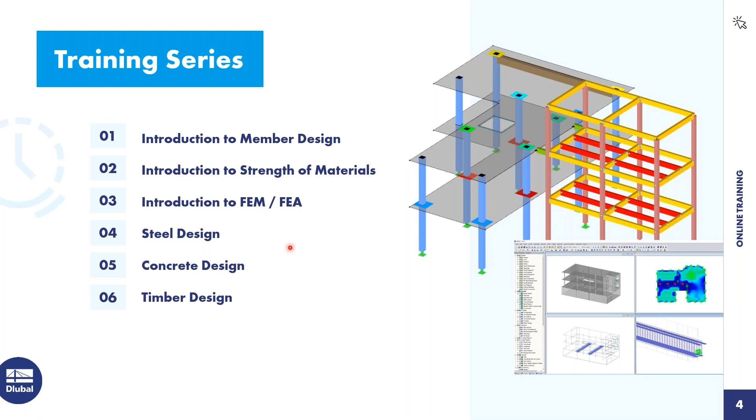Good, so our training series, 6 parts today, the 5th part, the concrete design. And yeah, what can you expect from today? So first of all, we start with an introductory example. We will model together a concrete beam with a cantilever. And then I will forward to Juliane and she will show you how to design our concrete slab. So let's jump right into it.

No theory, only modeling in RFEM 6. So I will open this example and I will create a new model. So for this case, I think it's familiar for you. I'll go here to File or click here on New Model. And now I create here in this dialog a new model with the name concrete beam. Yeah, I will leave it here as 3D type of model and everything else is set.

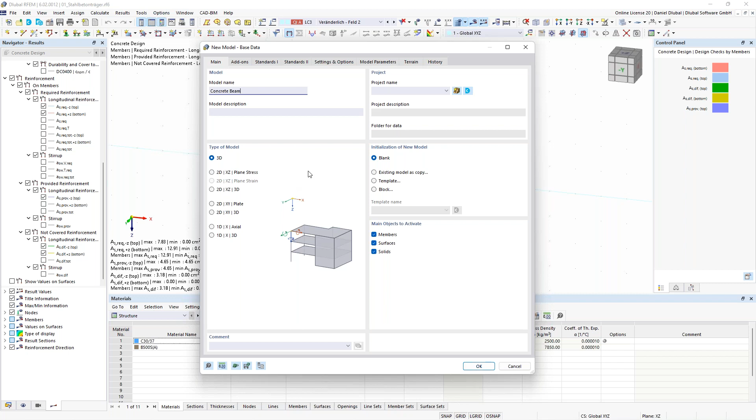And now for me, it's important to activate the add-on concrete design. So here we go to the design add-ons, activate concrete design, because then we get additional design properties for our concrete beams or concrete slabs. So I have to activate this. When I have activated this, I go here to the 3rd tab, Standards. And here in the Standards, I see here different chapters like for the design, standard group, load results, and also load case classification. And here I want to design it according to the European or to the Eurocode, with this national annex of Europe. Okay, I will leave it like that and just click on OK.

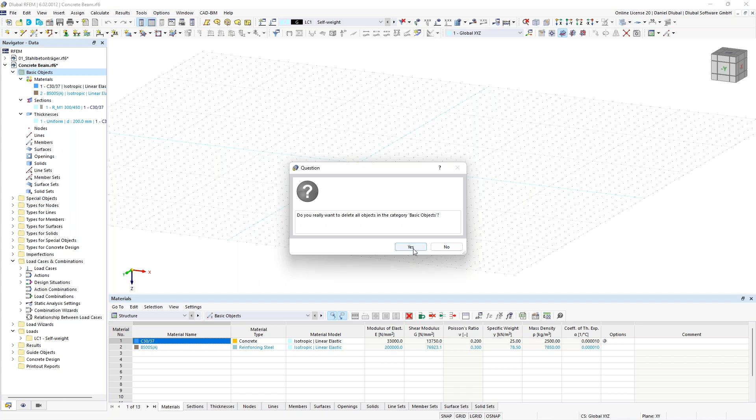And a new window opens. And as you can see here on the left side, I have here already some materials, sections and thicknesses. So they are remembered from the last project, from the last project I did. So I will delete them in order to create all these 3 things by new, just to show you how to do it. Okay, so you can click here on basic objects with the right click and say, okay, delete all basic objects. And now we can create it from scratch.

Okay, so before we do this, I would like to know from you if you have already some skills in concrete design with structural analysis programs, just to show me or give me a kind of status about your knowledge regarding your concrete design skills. So I have prepared a poll, which I will start right now. And please answer me these questions in order to give me a feedback about your knowledge.

Okay, now most of you have voted. I close this, share the results. So most of you have already designed concrete structures in a structure analysis program, I hope it was RFEM 6 or RFEM 5. For those who don't have this experience, that doesn't matter, you'll learn it today.

Okay, back to RFEM. Here on the left side in the data navigator, I will create 2 materials, because for concrete structures we need 2 materials: one for concrete and one for the reinforcing steel. So I go to new material. One of the biggest advantages in RFEM 6 is that I can search for a material via this text box. I enter C30/37. I am from Germany, and I will design it according to the Eurocode, because this is the only standard I know. This is the reason I choose this one.

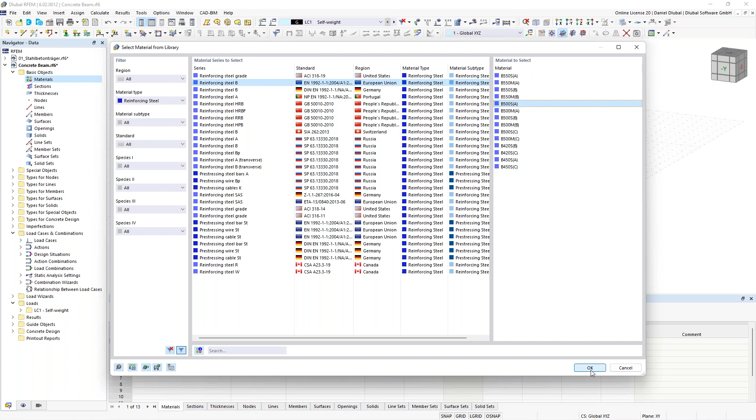In this case, I choose here B500 SA. I click OK, and yeah, this was it. I click OK again.

The next one is to create a new section. Because we will model and design a concrete beam, I click on section, then new section. I have to choose this rectangle massive cross section, or if you don't have this, go to the cross section library and choose the massive rectangle. Then I can give the geometry: I have a width of 300 millimeters and a height of 450 millimeters. Then I can see the section values according to this geometry and also the stress points. If I want, I can also show the unit stresses. In concrete design it's not so important, but we have implemented this here too. Okay, that's everything, I click OK.

Thicknesses, I don't do right now. This will be more the part of Juliane, because she will show you what thicknesses are. Thicknesses are similar to the cross-section things for members. Yeah, this is the similar thing - thicknesses you need for surfaces, and sections for members.

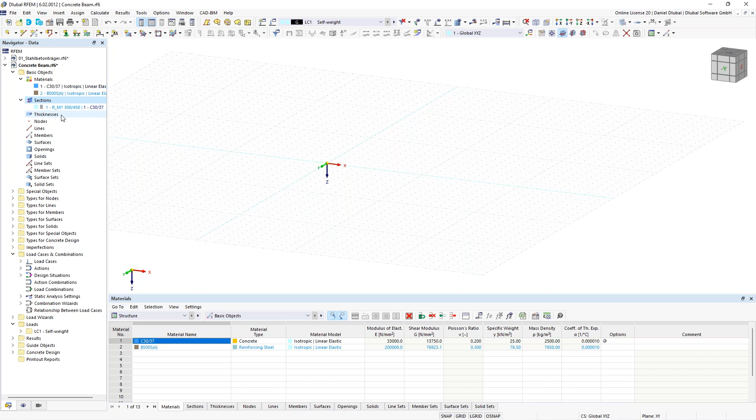Okay, so now we will model it together, we will model the beam. I go to the symbol bar, click on new single member, and now I choose the right section because I have only one section. This is everything, so I click OK and draw this member 8 meters long. I can do this via the grid points or also by inserting the member length, like 8 meters. As you can already see, we already have the provided reinforcement based on some general information about this concrete beam. We can modify it afterwards, of course.

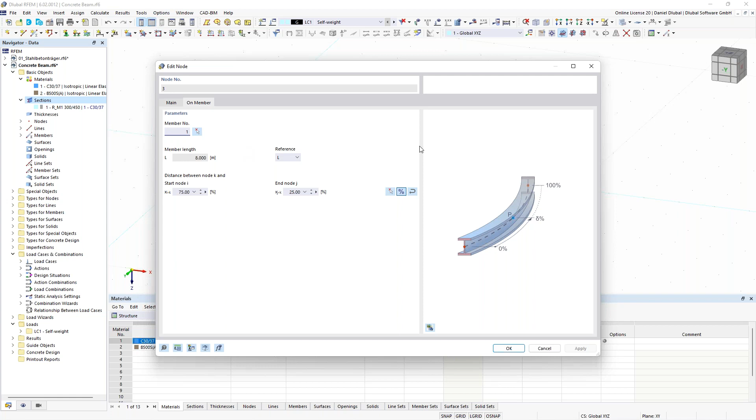What I want to do right now is divide this member internally, so the member remains as one member, but we add an internal node. Double click on the member, activate the option nodes on member. I want to switch to an absolute distance: I say, okay, from start, 6 meters away, and there it should create a new node. I click OK, and you see this blue node. Double click on this node - it has the node type 'on member'. So this is a really nice opportunity, giving this node the option to be part of this member and not to divide it.

Okay, so the next thing: supports, node support. I create a new nodal support. I want to activate the rotational around the global X axis in order to prevent torsion, and then a roller support along the X axis. This is this one. I click OK. Perfect, okay, so much for the modeling.

Now let's go to the load cases. I go to the symbol bar, edit active load case, and here I have the self-weight, this is okay for me. Now I want to also consider an imposed load case. In this case we have two fields, one field and the second field. So I create the first one, this is imposed load field 1. Now I copy it and click field 2.

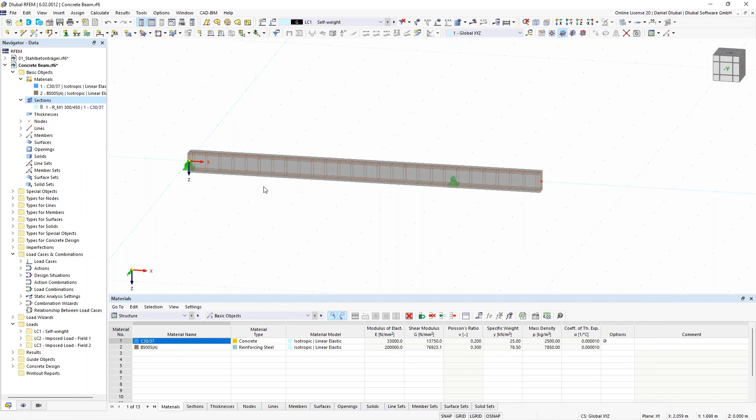Now I choose load case 1 because then I jump to load case 1 where I set some loadings. Okay, so the whole concrete beam has a member load of 10 kilonewton per meter. I click on this member load, and insert a value of 10 kilonewton per meter.

The biggest advantage here in RFEM 6 is that I can stay in this dialog, just select the same member, and then afterwards change the load case and add the parameters like the load magnitude again to the members. I don't have to leave this window. This is a real good advantage. So I click on this member, say apply and next.

Now I change the load case, and I have to change the load distribution because we only want to apply the load on the left field. So I say trapezoidal. Here I have 20 kilonewton per meter, 20 kilonewton per meter on the right side, and the load distance goes from 0 to 6 meters. I say apply and next. Now I change the field and say from 6 to 8. I can insert here 1, say okay.

Now let's do a check. Okay, seems good. So back to the load cases. Maybe a few words about that.

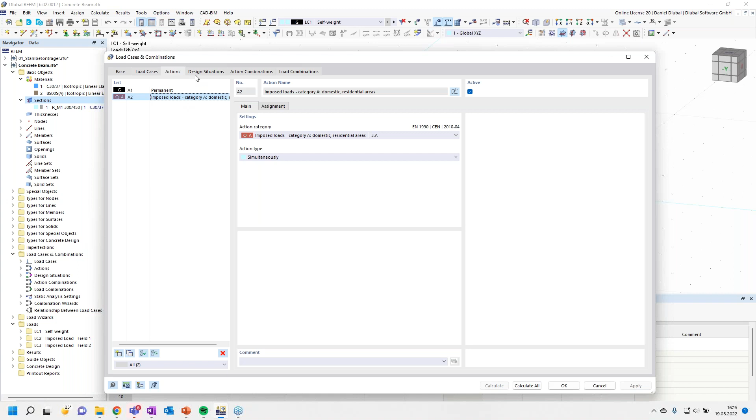We have here load case classifications according to this European standard, the Eurocode, and we also have this combination wizard, which helps combine different load cases with each other, considering the partial factors. We see here these different actions, and depending on these actions, it will get me the right factors for combining it, and according to the design situations it will combine it. You can also take a closer look at the combination rules, like here.

For our simple example, we don't need so many design situations. So these two serviceability design situations, characteristic and frequent, I will delete. I only need the ultimate limit state and the serviceability design situation, quasi-permanent. Let's go to the action combinations. Here are the factors I need for my load combination. Okay, good, this is everything.

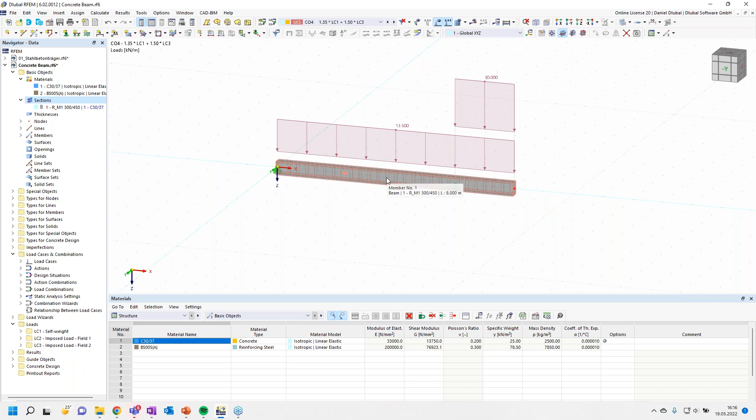Now click on OK. Now I need to define my design properties for my concrete design. So where can I do this? Double click on the concrete member, and now you see here the design properties.

When I have activated the add-on in the base data for concrete design, this option will be activated automatically. I can also deactivate this, and now you see all these registers here and the upper menu will disappear. When I activate it, the other tabs are there. So what we do now is go through these tabs.

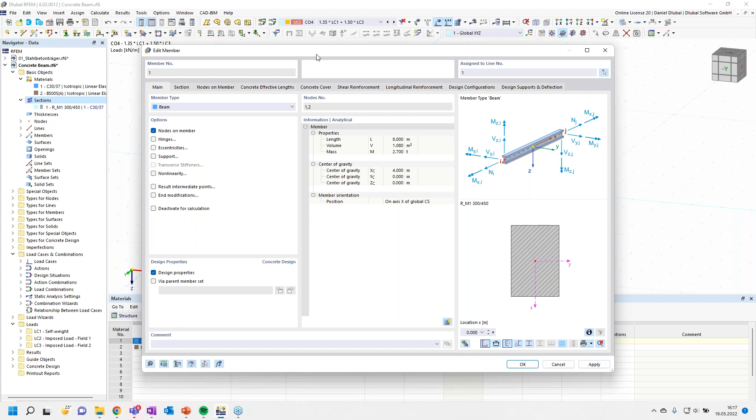What we don't need is the concrete effective length for any stability proofs, but this is a classical bending member, so I can neglect this. So I go here to the concrete cover. The concrete cover is pretty clear.

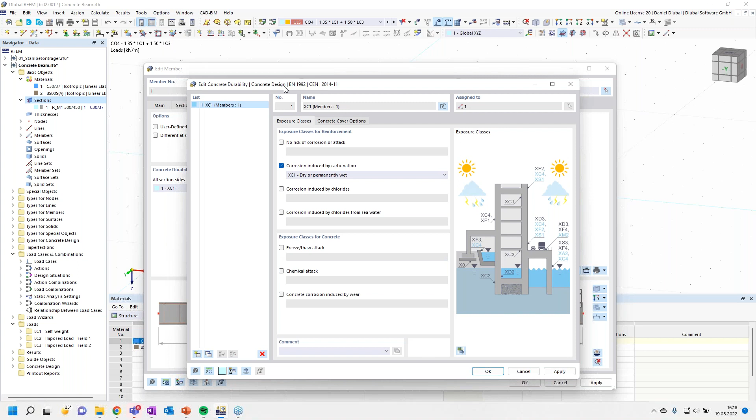You have different exposition classes in order to determine the concrete durability. You can open this - now it's for all section sides, but you can modify it. You see here different exposure classes. Here you have XC1 up to XC4 due to corrosion induced by carbonation, or also exposure classes for concrete freeze, thaw attack, and so on. Through these exposure classes, the minimum concrete cover is determined.

For our simple example, this simple XC1 is okay. I say okay again, and this minimum concrete cover is determined from the outer edge of the concrete rectangle to the outer edge of my stirrup reinforcement. These are 20 millimeters, determined by the exposure classes. I can also say a user-defined concrete cover, or when I want to consider it for each side differently, I can activate this 'different at section sides'. Okay, so much for the concrete cover.

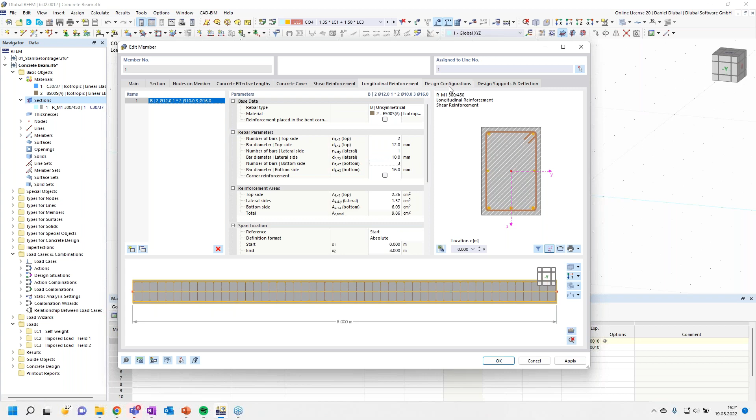So yeah, here you can define also several other options for the design of concrete. These are the information given by the standards. Okay, and the same also for the serviceability, but yeah, this is some more information.

So now the last tab is the design supports and deflection. So when you want to design the deflections, really the deformation proof, then you have to define here different design supports. We do this here for the simple beam. So in this case, I create a new one with a support width of 360 millimeters, and it's no inner support, only support in Z-axis.

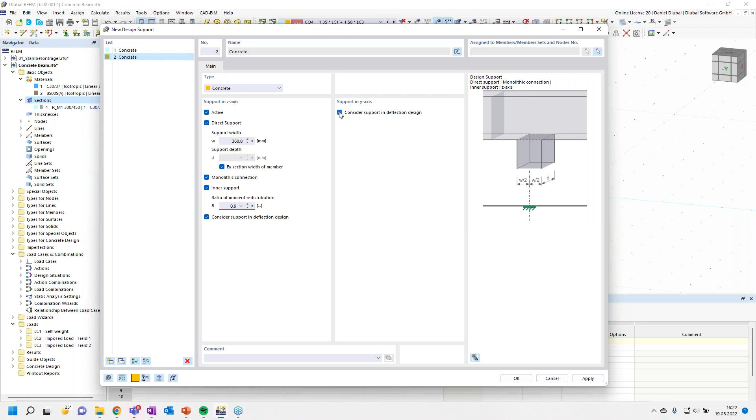And yeah, that's everything. Now I create a new one also with 360 millimeters. It has a monolithic connection, and the ratio of moment is in this case 0.9, and I don't need to consider any y-axis. I click on OK.

Now I have to assign it to the right nodes. So that is on member start, this is correct. And now here to the middle, the second one. Oh, sorry. No, this is not correct. Now this is correct. I say OK.

And now I can calculate it. Let's say concrete design. And now you see, okay, how the whole situations are calculated. Also for the serviceability.

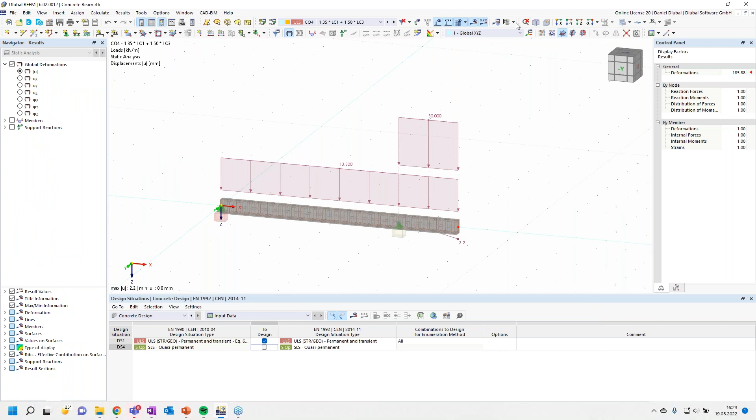And what I don't need is to design for the serviceability limit state. I only am interested in the results of my ultimate limit state. So I calculate the concrete design again. And now I see here the different design ratios for members, and I see, okay, here detailing of members and also the ultimate limit state, section resistance is not fulfilled.

So what can I do? I need to strengthen my reinforcement. Maybe here some words to this reinforcement.

Here on the left side, I see the results navigator, and here I have the possibility to show me different results, like the reinforcement. So I see here the required reinforcement for the, maybe I deactivate the design check. I can show me the required reinforcement for the top and the bottom.

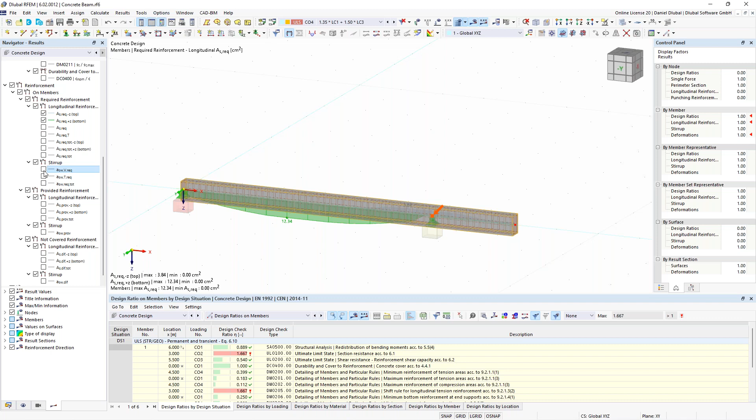For the top and the bottom reinforcement, I can show me also the stirrups and also the provided reinforcement for the bottom side. And I can deactivate here the rendering of the reinforcement by going here to the display navigator, go to types of concrete design and deactivate it.

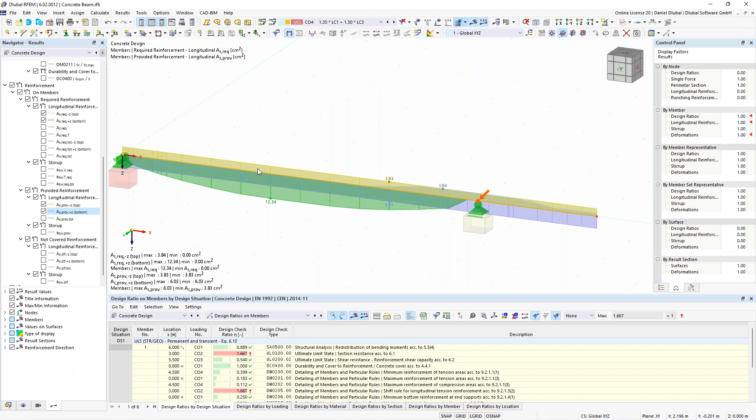And now I can see here the result a little bit better. So I see, okay, my provided reinforcement is lower than the required reinforcement. So I need to add some more rebars. And also in order to calculate here the difference, what I need, so the not covered reinforcement, I can also show it. Okay, so what can I do?

Go back to the concrete beam, go here to the shear reinforcement. Now we want to add more rebars for some places. So I go here and copy it. And now I want to cover it for different fields. So you see, okay, the start and end goes from 0 to 4. I say, okay, this should go to 6.

And this one should go from, oh sorry, this should go from 5 to 7 with a distance of 0.1 meter. And the other one should go from 7 to 8 meters.

And the longitudinal reinforcement, let's make it quite easy. So what I can do here is just increase the diameter for my top side and add here a diameter for the bottom side to 20 with 2 bars more. And it looks like that.

I can show this reinforcement plan by clicking this icon, and I see it here like that. Then I click OK. I design it again.

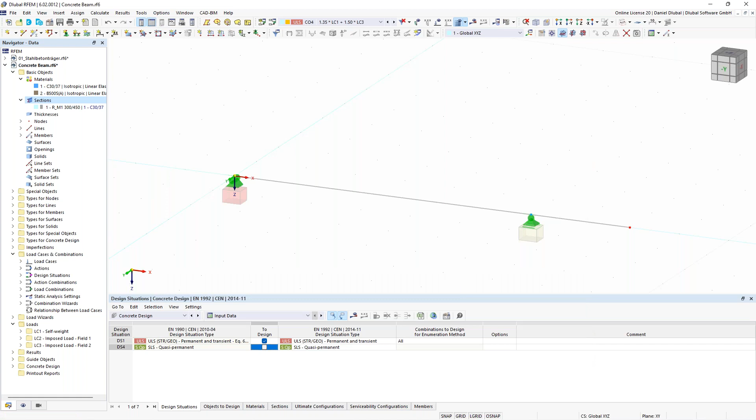And now I see here my fulfilled example, my fulfilled design check ratios. And by clicking on one of these, like this one, you see also here this design check. Also, you can switch here to different design checks. So in this case, we have here the design check according to this standard: shear resistance, reinforcement shear capacity.

And when you are at study and you want to compare your results with the results of our program, then you have here an overview of how the program did this. Okay, so much to the beam design.

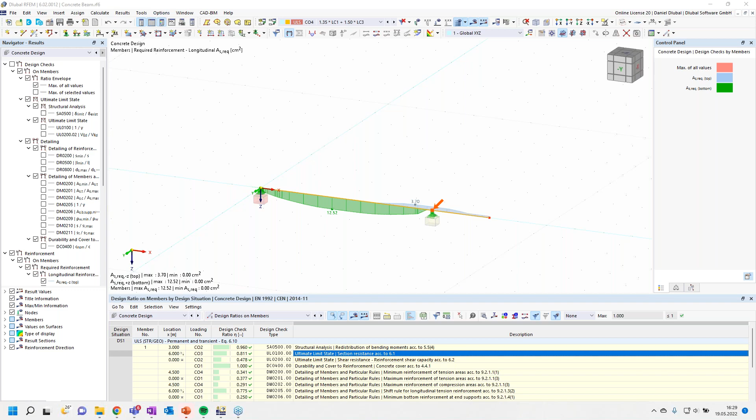The parts of the structure will be of the material C30/37, and the wall and columns will have the concrete C25/30. We will have the self-weight as a load and also apply a live load of 3 kilonewton per meter square.

Then we will again do the load combinations and let the program generate it for us. After that, we will do the analysis and use the results for the concrete design. So this is it so far as a preparation.

Now we can go into the program and start modeling. I will again open a new model with this icon here, and we get into the base data dialog. I enter the name, it will be a slab, and it's made of reinforced concrete, so as additional information I give it here.

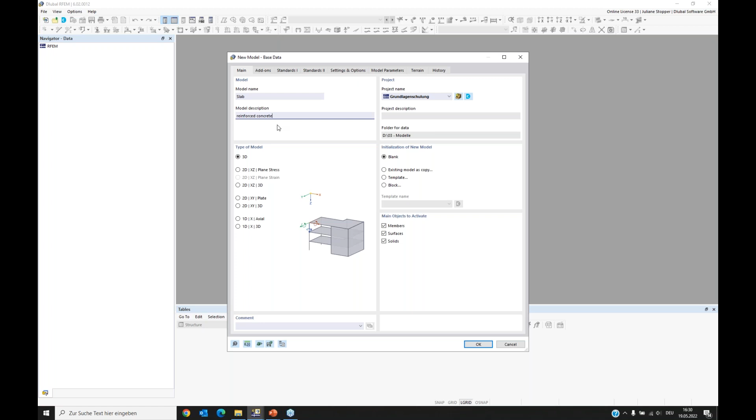The other settings we don't need to change. Again, we have to activate our design add-on, the concrete design, and in the standards I also want to keep the National Annex CEN as Daniel did. Okay, so we can agree and say okay, this is okay.

So now an empty model is prepared for us and we can start modeling. I would like to use a guide object with you, a background layer.

We have a drawing from the architect in a DXF format, and we can use it as an orientation to create our RFEM 6 model. Therefore, I have to get the file from my folder where I put it, and I have here the ground plan for our slab.

And we have here the preview. We can check it, and looking at this, I can see that I need to rotate it with an angle of 180 degrees around the y-axis. And now in my preview, I see this is what I wanted, positioned like this as a background layer.

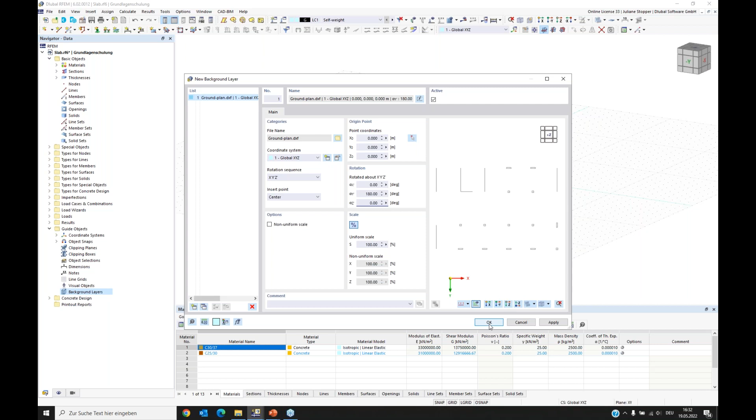So I can say okay, and I have it in my model now. All these lines are DXF objects. Now I need to create my objects that I can use for the RFEM 6 model and the analysis.

Therefore, at first I want to start with the lines. I will create the boundary lines for the slab. We have one here and we have one here.

If you want to end any process you are in, you can do it with right click, and you can leave the thing you are doing currently.

So now I want to copy this line. I select it, and I press Control, and I can click on the line and then draw it to here. Okay, and I will do the same with this line. I press Control and put it here, and I've finished my boundary lines.

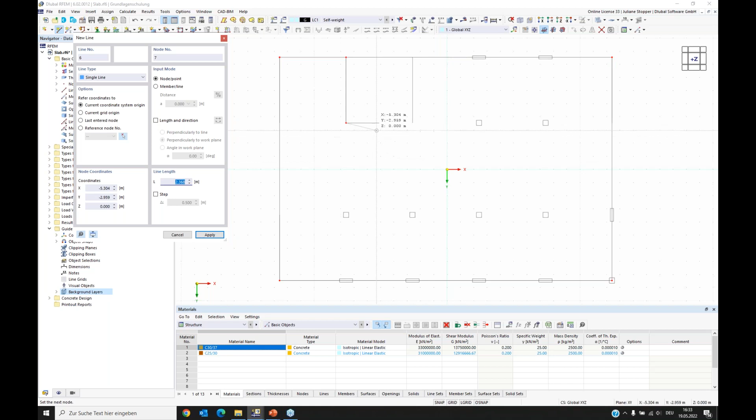Then I also want to have lines here, because the lines we see are DXF objects, and I need to have parts of the structure modeled with RFEM 6 objects.

Okay, so what I also need is nodes. I need nodes for these places where the supports or the columns are placed. So I put some nodes, I will do it here.

I can see that I need an X value of 2.40, but I cannot reach here correctly, so I put this node here and another one here. Now I can edit this node. I double clicked on it and I can see the coordinates here. As we saw, I need 2.40, and I can say okay, and it goes there. And here I checked it, I need 7.40, and then it will be at the right place.

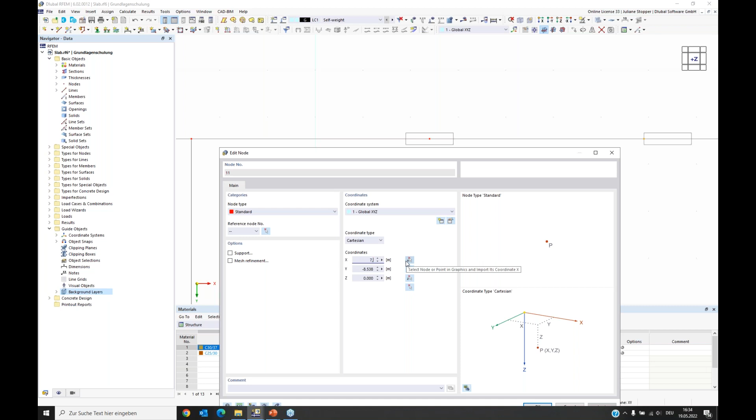So now I prepared the nodes on that line, and I need them actually in this line and this axis as well. So I have to select them. I want to copy them.

With pressing Control, I can again and again add the selection. Okay, now I want to use drag and drop. I press Control and I can take the node and copies are created, and I can put them at the place where I want them. Here's the end of the wall and it fits. And now I can see the newly created nodes are selected again, so I can go on with them.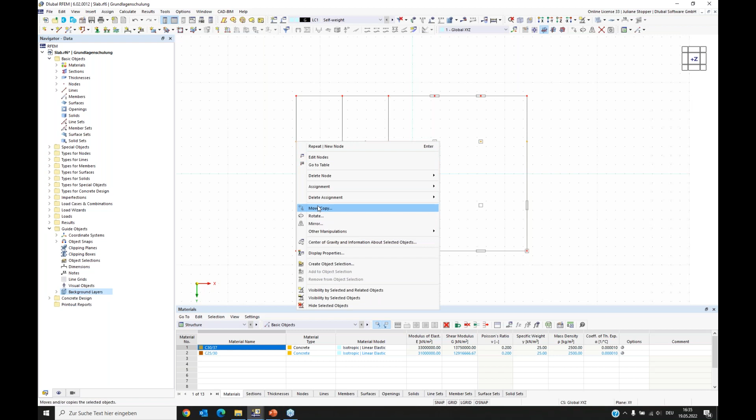And now I want to show you this menu. I did a right click on the node. I also can use this move and copy option. I say I want to create a copy and I have to give the displacement vector here. And now I want a vector like this. And I can say apply, and I can see the program copied it, and I can repeat this and do another copy into this row and say OK. And now I see I have all the nodes that I need for modeling.

Now there is one thing I want to do. I want to divide this line into parts, because when I want to define the surface, I want the surface to be within these lines. So I shouldn't have a line that is not divided. So in order to do this, I select all my lines and I can use this option here. And now every line is divided at the nodes or lines that it's connected with.

Okay, now I prepared the first step of the geometry. Now I also want to use the data navigator and work from top to bottom like this. At first we want to check the materials, have a look at the list. I also have the first two materials from my last model and I want to use them with you. It's the C30/37 and also the C25/30 that we need.

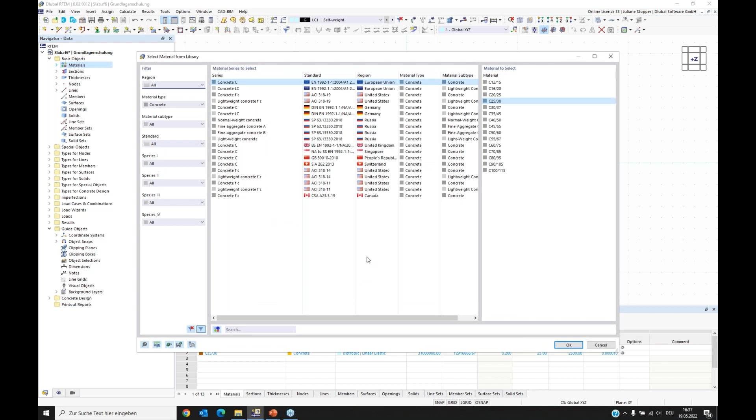One material is missing, our reinforcement steel. So we go to the library and choose for European Union the steel, and I want to have this. What I remembered now is here I will check this. We will have a look here. No, it's okay. I checked the standard because it's important that the standard fits to the standard you selected at the beginning. But it fits, I have the right standard. Okay, so now my material list is fine.

I can say OK and leave this dialog. Then we can go to sections. And I also want to delete it so that we can create it together. We create a new section. And yeah, it's right, it's going to be the section of our L-beam. And it has the same material like the slab. And here we have provided cross-section types for beams. And we are right, we want to use the rectangular. We can go to this dialog for entering the dimensions.

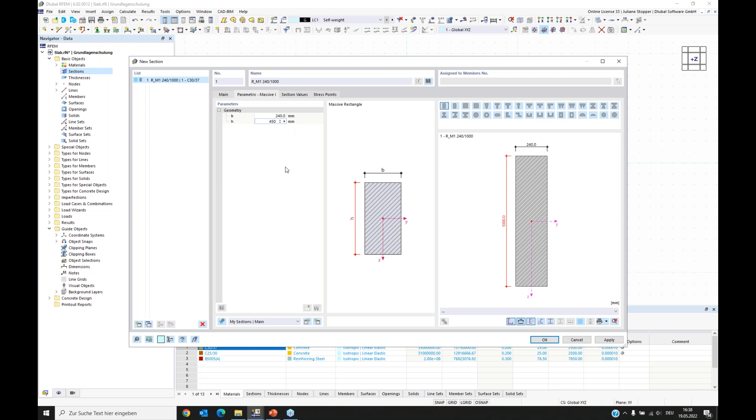Now I will show you. We want to create our L-beam, so we have 24 centimeters and 45 centimeters in the height. And we can enter this: 24 centimeters and 45 centimeters, so 450 millimeters. Okay, then I have my section prepared for the L-beam, and I also will prepare the thickness that I need for the surface.

As Daniel said, for beams, for 1D members, you need 2D cross sections, and for our surface, which is a 2D member, we need only to define the third dimension, the thickness for it. So we can go here. We have the dialog for the thickness. It shall be a uniform thickness. This is right, it's the material for the slab. It's also right, but it has to be 24 centimeters, so 240 millimeters. Okay, and I say okay.

Now I prepared my cross sections. Then I can go on with creating the surface. I could do this from here, but I want to use an option we can reach here more easily. We can define a surface via the selection of boundary lines, and this is what I want to use now.

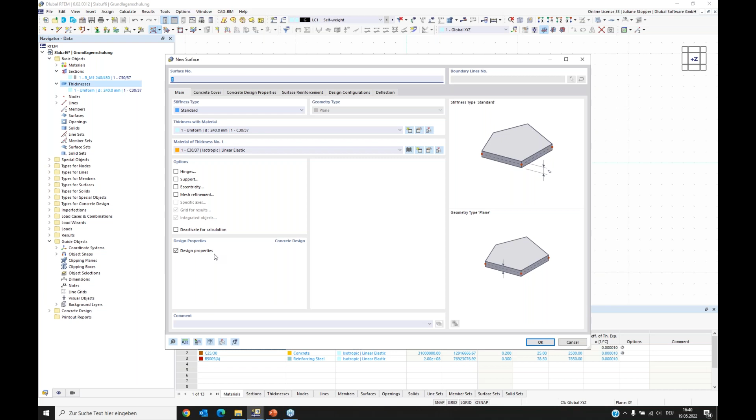Here we see the dialog for the surface. Here we can enter all the things, all the options the surface has, all the settings and input the surface needs. And it shall be a stiffness type standard. This is good, we have the right thickness and the right material. And as we can see, because we applied the concrete design add-on, we also have design properties. Those I want to have a look at with you later. Okay, so we can agree. And now the program, if we go into our working window, the program tells us what to do. You can read it here.

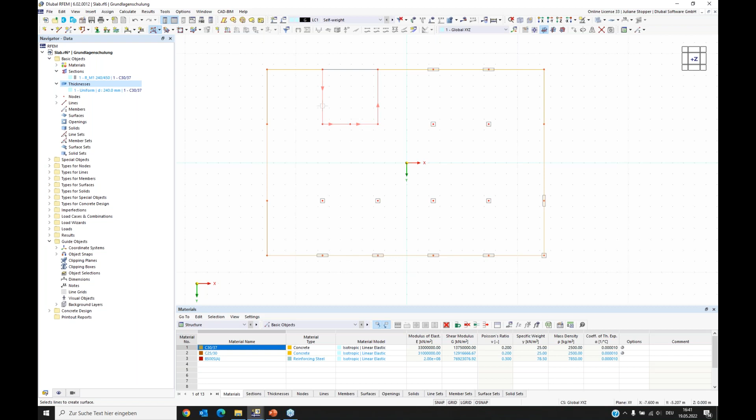When I go back with my mouse into the field, we can see that now we are supposed to select the lines for creating the surface. So I just select the lines, and RFEM 6 created the slab, the surface. Okay, I can leave this.

I do a right click, and now I'm free again. So now I want to create the L-beams. The L-beams are positioned everywhere where no wall is positioned at the border lines. So I select all the lines that will get or receive an L-beam between the columns. Here's going to be a wall, so I go on here. We have a wall here. Here shall be an L-beam, and here are going to be walls.

So my lines are selected. I can do a right click on the line and say edit lines, and I come into the dialog for editing lines. Here I have the option to say that for these lines, there shall be a member along these lines. And then we activate it, and when we activate it, we get into the dialog for defining the member. And here we can see the member type we have to set in the main window.

We have a special member type for L-beams or T-beams. It's called RIB in RFEM 6, and I selected it. Here you can see we want this type of member. And with entering RIB, we see that a new register opened, and we have to look at it. Here you can decide whether your beam shall be below or above, or maybe centric in the surface. We choose the one where it shall be positioned below. Okay, then we can go on.

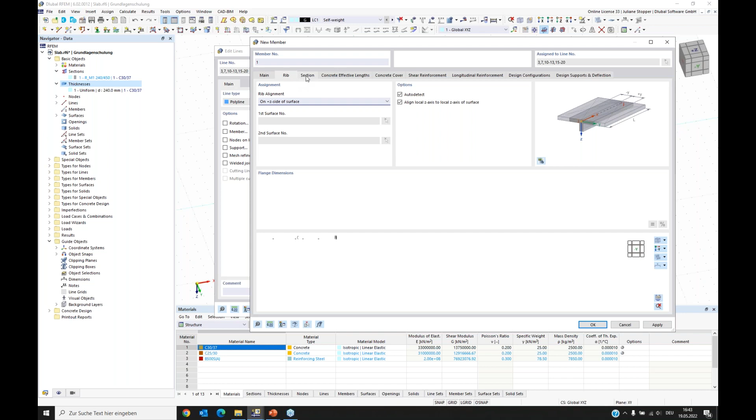We go into section. We have to define the section for the member, for the part below the surface. And RFEM 6 automatically applied the first cross section that we defined. So this is the right one, the one we defined, and the material is right as well.

We can say okay. What I want to do is switch off the design properties, because today our main focus is on the slab, and we don't want to analyze the design for the RIB as well. So I can switch off the design properties. The program then knows that these RIBs shall not be considered in the concrete design. And I say okay and leave this dialog. And now all these lines have these members applied, and we can see it in the main window.

Now we finished actually the structure. As I said, we want to have the design for the slab. So we are actually not interested in the inner forces or stresses or strains in the walls or in the columns. That's why we don't need to model them.

We have a special type of support that I want to show you. At first, we go into the types for nodes. Here we can find nodal supports, and I want to create a new one. We have in RFEM 6 the option to give a support that contains the stiffness via a fictitious column.

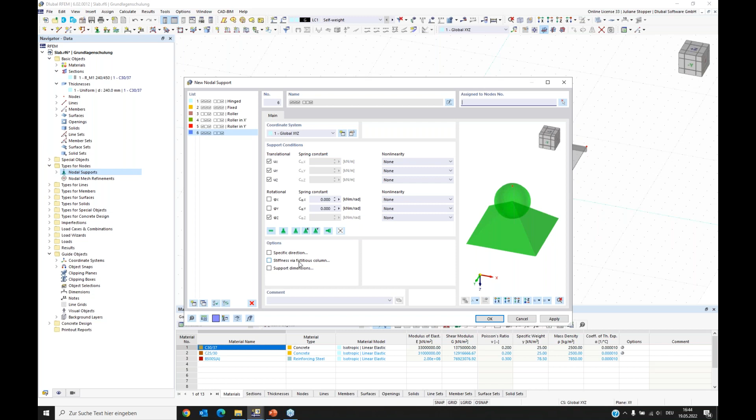This means I can activate it, and then a new register is opened and we have a look at it. Here we can enter the dimensions and the material of the column, and RFEM 6 from this information calculates the stiffness the column has. So we can model a support that behaves, from a point of stiffness, like a column behaves, but we don't need to model the column, and we don't get inner forces or something. We are not interested in it.

So I can choose here elastic nodal support. This is what I want to have. Our column has dimensions 40 centimeters by 40 centimeters, and it has a height of 2.25 meters. Yes, and it is hinged at base and head. And I have to take care, I should change the material. We have a less stiff material here, and this is the stiffness of the spring the program calculates from this column's dimensions and material.

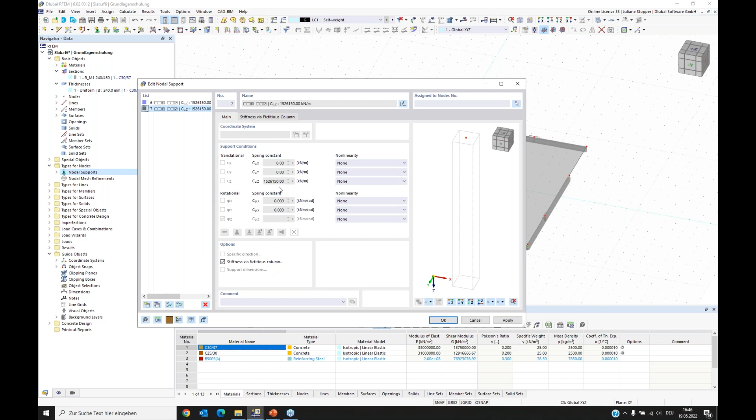It fits 25 centimeters in the height. The height of the column is 3.25 meters. This is right. And the other settings we can keep, it's right from the copy.

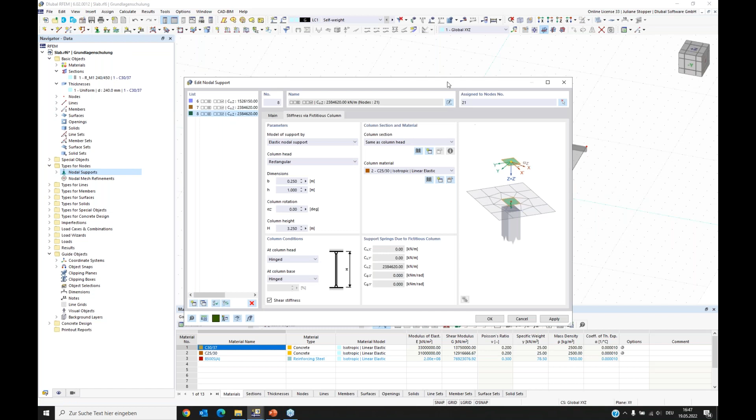I can apply these columns here and say apply again, and I can create a last copy. Here I change only the width and height, and I can apply or assign this to this node. Now I have all my different types of columns defined, or the supports of them.

And we can see it here. I can also change the display of the model. I can say that I want to see a wireframe model, then we can see the supports more clearly. And if you think the supports are a bit small, you can right click on them and make them bigger, so it's easier to see them and check whether a support is everywhere one is supposed to be. Okay, we have the same tool for walls.

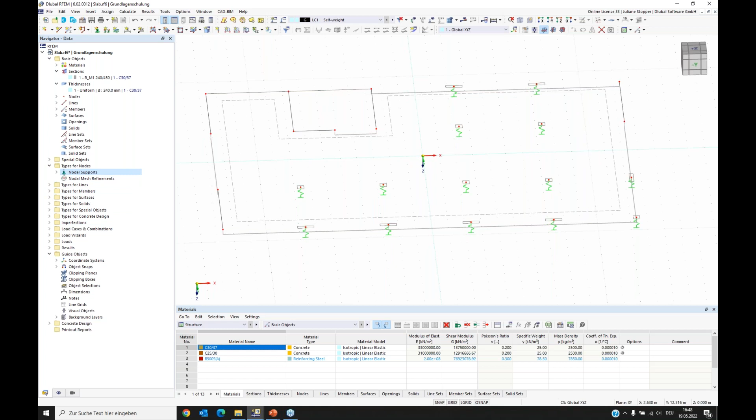We can consider the walls as line supports, so we can go into the folder types for lines, and here we have the line supports and can create a new line support. Here I have the stiffness via fictitious wall, and I can only reach this option if I activate the local XYZ coordinate system. Now you can see it's possible to activate it, and we again have to define geometry and material. The wall has a thickness of 24 centimeters and again a height of 3.25 meters.

The material also shall be material number 2, and now the program calculated the stiffness that resembles the wall. The X direction is the direction along the length of the line, so we have a stiffness in this direction, and the Z direction is the vertical direction. We have also this spring.

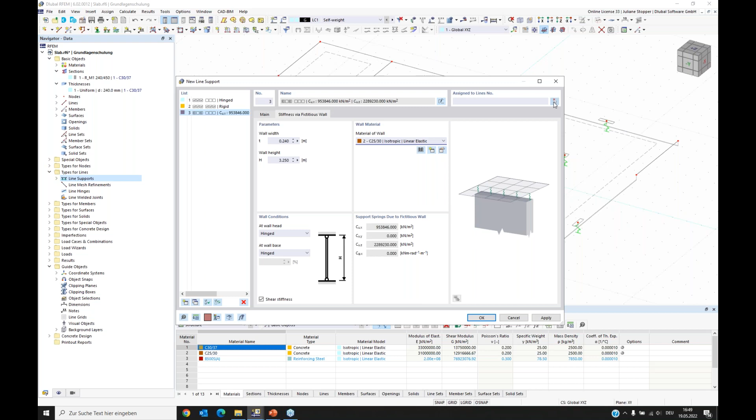Okay, now we can assign it to the lines where we actually have walls, and they are these. And here's another one, and I think it's completed. I can say okay, and we are now fine. Now we have all the supports that we have from the walls and lines. I again go to the transparent model, and I can see our structure. We have finished the structure now.

What we need is the loads. So we can close the settings for the structure and go to the load part. At first we enter this load cases and combinations dialog. We activated the combination wizard, as you saw with Daniel. Now we can go to load cases.

We have as a default load case, always load case 1, which is a self-weight load case. You can also see here the self-weight is active and it's a permanent load case. And we want to create another load case. This is the live load case, and here we don't want the self-weight to be active, and it has to be an imposed loads load case.

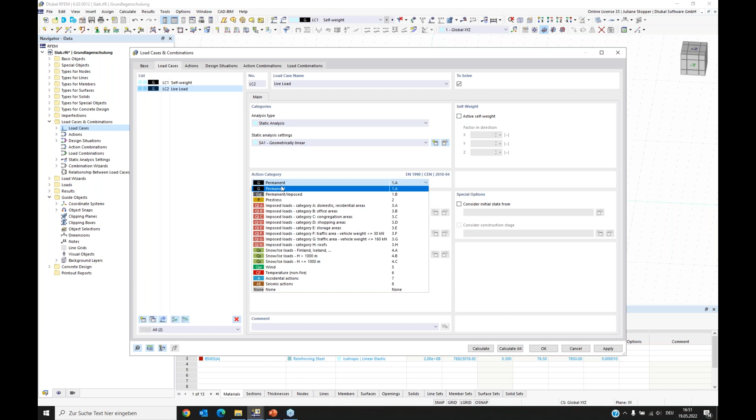It's important that you take care about defining the right action category, because we will do the action combinations. The combination wizard is going to generate them for us, but it can only do it right if you set the right action category. So we have a permanent load case and an imposed loads load case.

Okay, then we can have a look at this. Here you can see which type of action categories you have in your model. This helps when you have a lot of load cases in bigger models to keep an overview. Then we can go to design situations. We have those prepared for the concrete design.

And I want to show you also the combination wizard. Here you can do settings for how the combination wizard shall combine or create the load combinations. And I want to use the geometrically linear analysis. I activated it here, and we don't need to consider imperfection cases. So I can set it okay, and then we can go on.

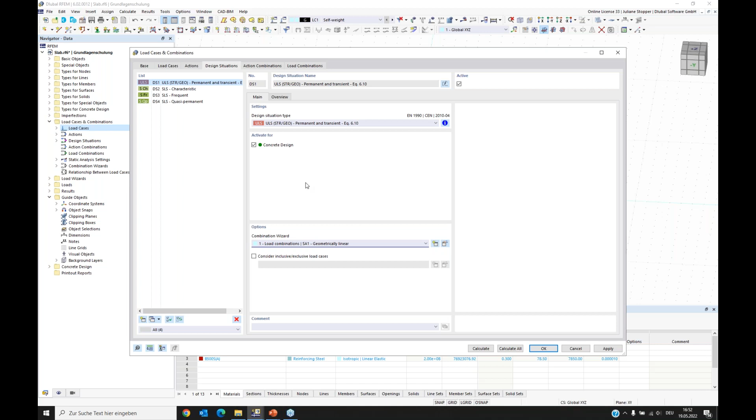We can check the action combinations and see also the load combinations that are generated from that. So now we finished that part. It's okay, we have the load cases and the combinations. Now they are prepared and we need to fill them with loads. We have this folder loads here, and we can see our load cases, but they need to be filled.

We need to say what kind of load has to be contained in the live load. In self-weight, we have a load because we said self-weight shall be active. This means the program calculates the self-weight of the structure from the cross sections and the specific weight of the material.

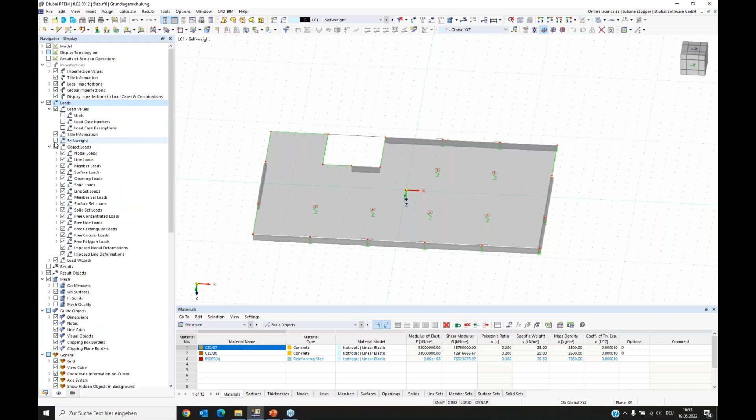So we can have a look at this. I switched from data navigator to navigator display, and here we have the option to activate loads, and within the loads we can activate the self-weight. Then you can see for load case self-weight what the program calculated for the construction parts. So we can see load case 1 has a load. Now we can go to load case 2, and we see we don't have a load yet.

So we create one. We create a surface load with right click and say new surface load, and it's supposed to be 3 kilonewton per square meter, and we apply it to surface number 1, and it's okay. And we can see now we also have a load in our live load case.

So I want to save it once. It's good to save from time to time.

Yes, this is it. Now we prepared our model. We have the structure, we have the loads, we have the geometric boundary conditions. Now our model would be ready to do the finite element analysis. We could calculate the stresses and strains, the inner forces and displacements for this structure.

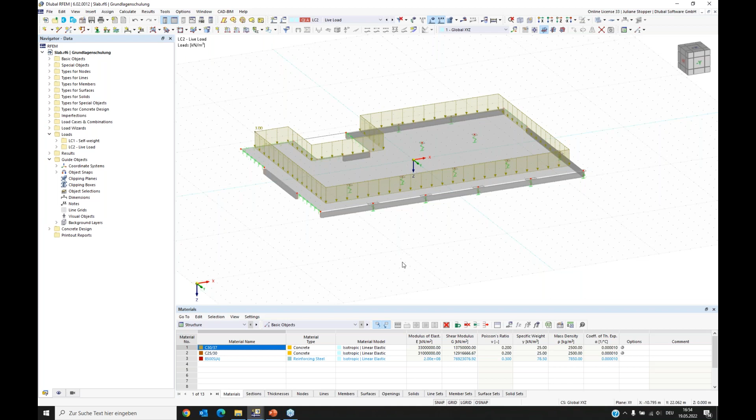What we want to do as well is the concrete design. So we have to define the properties for the concrete design. Therefore, I just double click on the surface and we can see all the design properties that I can set for this surface. Now I want to have a look at them with you.

Here we have the concrete cover. I think Daniel said a lot about it. It's fine, we can go on, I think.

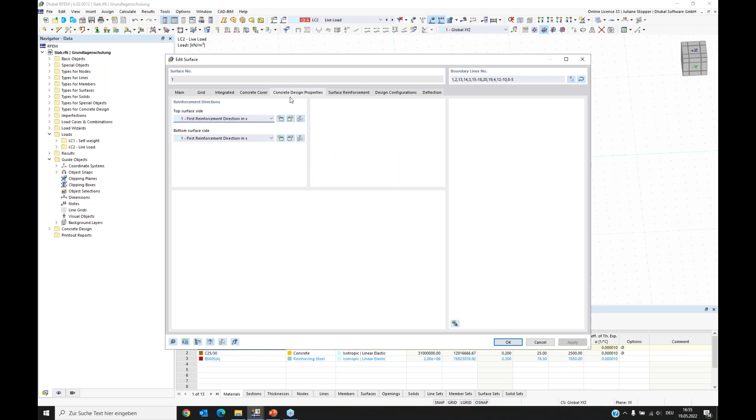We have for the surface the option to set in which direction the first reinforcement direction has to be. For us, it's now X, and the second one is in Y direction. Then it's okay for us.

We can go on. Now we have the register for surface reinforcement, and we see that our list is empty. So we have to define a surface reinforcement, and we can do this via clicking here.

And then we have the dialog for defining new surface reinforcements. Here we have a surface reinforcement of the type 'on surface'. This means the surface that is assigned will get this reinforcement everywhere, so independent of the geometry of the surface, all of it will be covered with this reinforcement you define here.

I want to, at first for the top, define a reinforcement of 8 millimeters with a distance of 15 centimeters, and in the transverse direction also 8 millimeters with the same distance. The program tells you how much centimeters square per meter you put, and yeah, it's fine for me.

I say apply, and I copy this reinforcement because I just put it at the top. I want to create the same at the bottom for now.

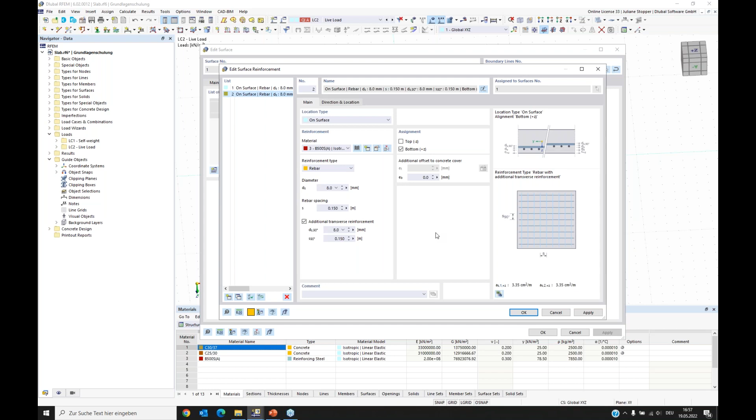I generated, I entered two different surface reinforcements for top and bottom, because I can imagine that maybe later I will change one of them. They don't need to be the same. So I can say okay, and now my surface has a reinforcement.

Then we again have design configurations here. We can have a short look into them. With Daniel, you saw those. We can have a look at the surfaces - this is something you should have a look at. For now, for us, we keep the default settings, but you should know what is decided in here.

For example, now we have minimum longitudinal and maximum longitudinal reinforcement defined for plates or for slabs, which is fine for us. But if you want to make the design for a wall, you should apply design configurations for walls and this setting for walls. But for us, for now, it's okay.

I can say okay and keep the default setting. We have something similar for the serviceability state. Yeah, this is what I wanted to have a look at with you for now.

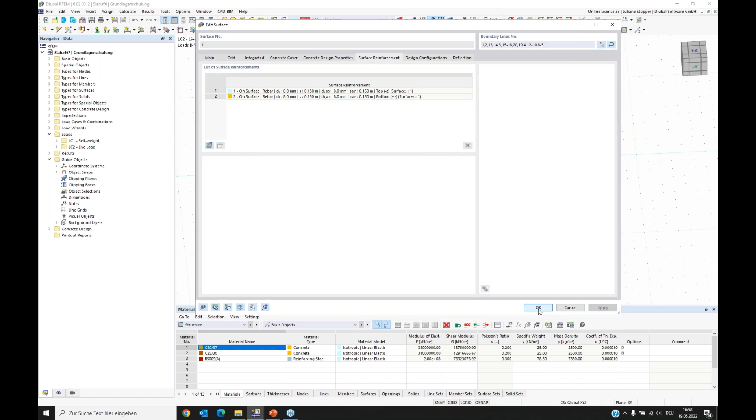We defined our surface reinforcement, and then I close it. And now we also can see it in our graphics. Here I can switch off the loads, so now I can see that my reinforcement is contained in my surface.

So this is it for us. We can now start the analysis, and I want to do it from here. We can choose the concrete design in the table, and here we have our input data. For now with you, I want to just do the ultimate limit state analysis.

So I switch off those. And also in the objects to design, I want to say that I only want to solve the surface. Actually, the program sees that the ribs, which are members, cannot be calculated. They are invalid because they don't have a reinforcement, so they wouldn't be contained in any way.

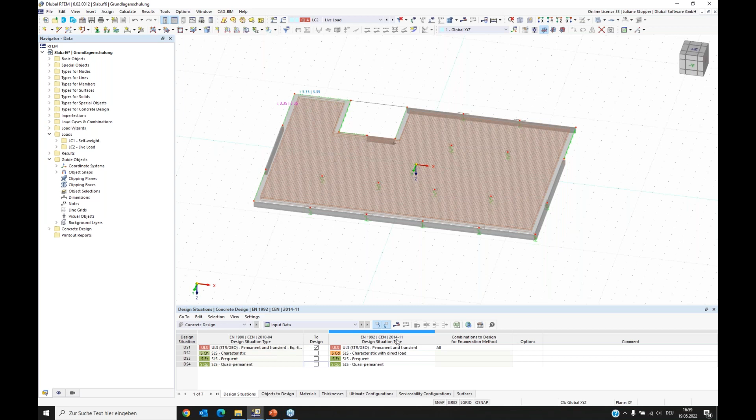And also I switch off the nodes for punching. So we have our surface. Yeah, and we did these settings. Now we can start the concrete design from here. And I started.

The program knows when we want to do the concrete design, and it also calculates the design situation needed for the concrete design, as well as the load combinations contained in that design situation. So it calculates everything needed for the design.

Yes, and here we have our result. I want to show you, as I said, for the concrete design, we want to solve the ultimate limit state, which uses design situation 1, and design situation 1 contains all the ultimate limit state load combinations.

So if we check one of them, we see we also have results for those. What I want to show you also is here we have our navigator results. Here we can decide about the view on results, and we can set here also static analysis, where we have our results of the finite element analysis. I will switch off the mesh, we don't need it.

Here we have global deformations, internal forces, stresses, and strains. And these results are used in the concrete design. So now we can go to the concrete design.

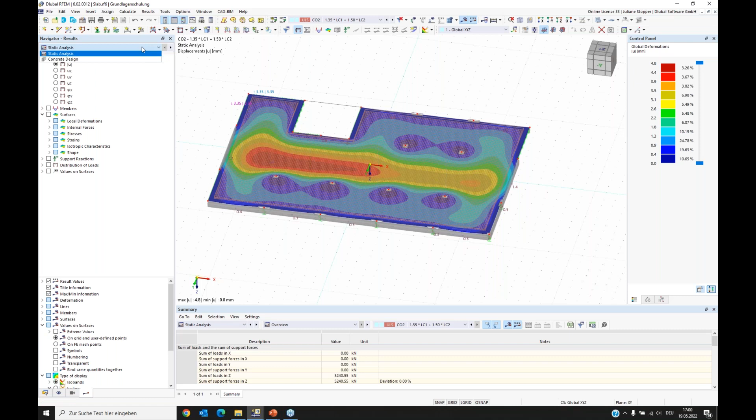I want to now switch off that I can see the reinforcement, because it disturbs the view on the results. I can do all these settings for the display in the navigator for display.

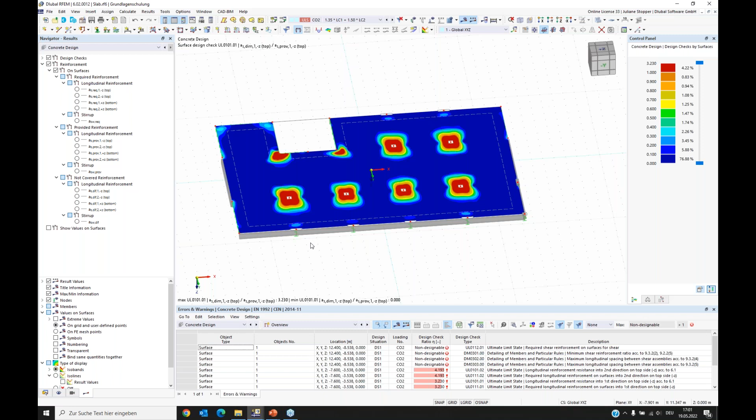And I can here in the model, in folder types for concrete design or in the point types for concrete design, switch them off so I don't see any reinforcement, and I can look on it from in that direction.

So now we have our first design results, and at first I want to show you this. This is the overview for the design, and it generally at the beginning doesn't look very friendly, as here all the problem points are listed. You see a lot of red at the beginning, but this will change.

I can here say that I don't want to have this overview. I want to see now, for example, design ratios on surfaces. And if you have more surfaces, you can also set that you want to have it separately for each surface. But we have only one now, so this list is fine for us.

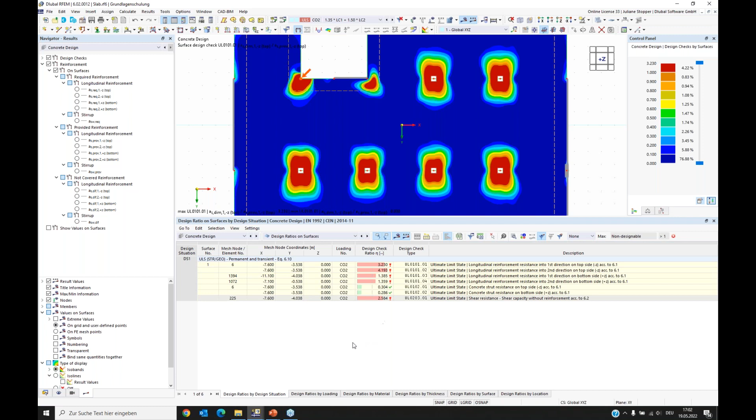Here we can set which design checks we want to see, which design check types. Now we have the ultimate limit state active, and here are also detailing proofs active, but I don't want to have a look at them now. We only want to at first check the ultimate limit state, which is also the much more important thing.

Okay, so now we can have a look at the navigator results a little bit more in detail. We have two main things that we can look at: we can look at the design checks or at the reinforcement. At first, I want to have a look with you at the design checks for surfaces.

And we now are looking at this one, UL0101, which is for longitudinal reinforcement into first direction on the top side of the surface. This is something we can imagine and expect. We have the most high ratios around the supports, so we have here at the top of the surface the tension around the supports or above the supports. And the same is in the second reinforcement direction, we can see.

And now we can guess what will happen if we look at the bottom side of the surface. Here we can see that we have the most tension and the highest ratio for these checks in the fields of the surface, as there is the tension at the bottom.

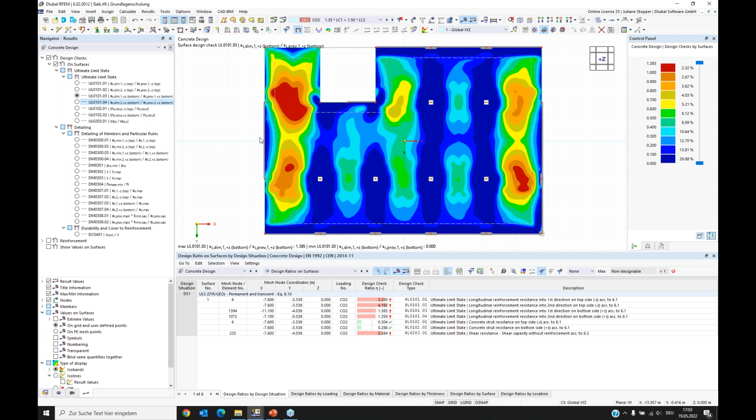Okay, these were the results of the design checks. And now we can have a look at the reinforcement the program calculated with doing these design checks. We can see which reinforcement is required from all these design checks the program did.

And we can have a look at the top. Here we can see which centimeter square per meter, how much is needed for top in direction 1 and direction 2, and also for the bottom of the surface.

What we also can see is which reinforcement we provided. We put reinforcement in there, and here we can see it. It's 3.35. We put this in each direction at the bottom and at the top.

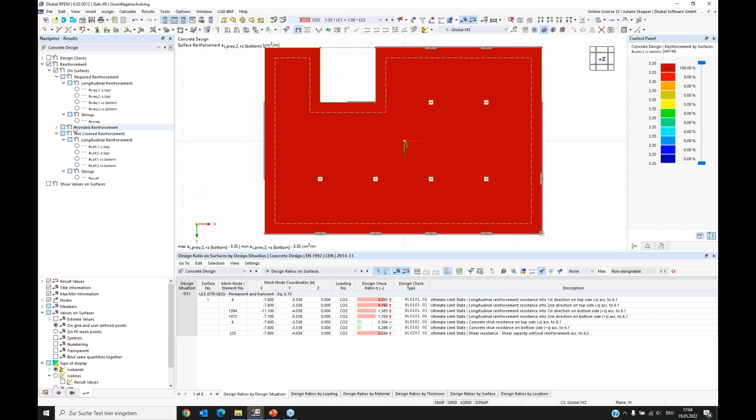And the program also gives an overview about the not covered reinforcement. So we provide reinforcement, and it compares the provided and the required reinforcement and shows where our provided reinforcement is not enough.

And there we can see at the top of the surface, in this area, we don't have enough reinforcement in this direction, and in the second direction like this, and here in the fields.

So the first step that I want to go with you is changing the bottom surface reinforcement. Therefore, I go back to the data navigator, and before I went to the design properties by clicking on the surface. Now I want to show you that all these concrete design settings you also can find in the data navigator.

We have here the types for concrete design, and here are all our reinforcements in the whole model. And here we have the configurations for the concrete design.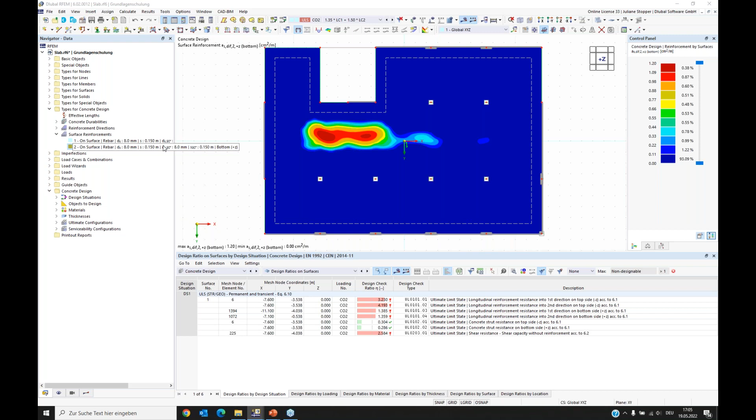But now we want to change our reinforcement. The second reinforcement is for the bottom. I double click on it and I can edit it. Now I want to put the diameter 1 centimeter at the bottom of the surface. I say OK, and the program gives a warning because our design results will be deleted since I changed the reinforcement. It's OK for us, and I can recalculate the concrete design.

So now we can have a look into the not covered reinforcement, and we can see I put enough. We don't have any problems at the bottom of the surface.

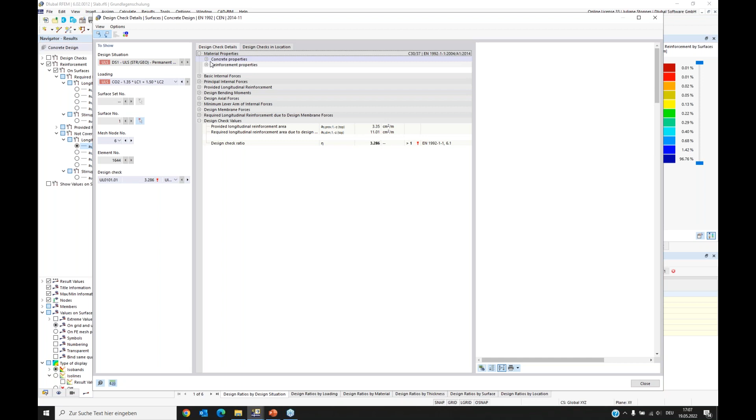Now we want to care about the top. I didn't change something yet in the top. And what you always can do is, if you go here on the design ratios, you can have a look at these positions where the ratio is too high, like Daniel showed. You can double click on the design check type and compare it with some analytical solutions or hand calculations. You can check everything that enters into the design check for the concrete design, and you can follow the standards, the equations from the standards, as we always write from where this equation comes, and you can go there and compare it. It's really comfortable to follow what our program is doing in this concrete design. You can find all these values that you need, everything that you did.

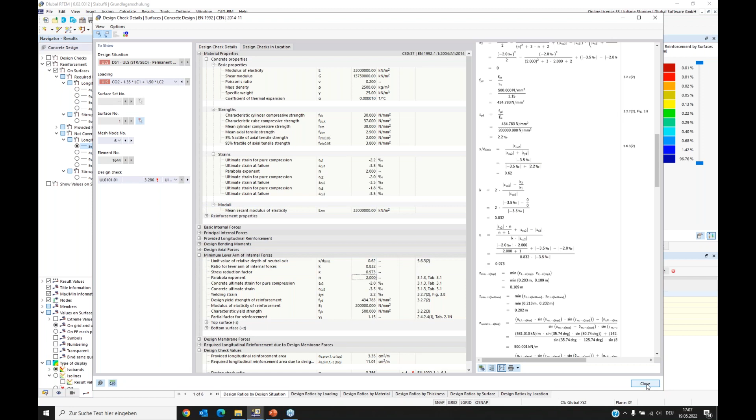Each formula is listed here. And when you check this and agree that there is more reinforcement needed, you also can put some local additional reinforcement, and we will do this now for these support places.

Therefore, we go back to the data navigator again, and I can right click on surface reinforcement and say that I want to create a new surface reinforcement. Here we have the type, and now I don't want to put reinforcement on the whole surface. I want to use a free rectangular reinforcement. The material is automatically entered here.

What I want to do is apply a reinforcement only on the top, as I have the tension on the top, and I want to have it in both directions. I will put 16 millimeters with a distance of 10 centimeters in both directions. So here you can set the dimension and the material for the reinforcement.

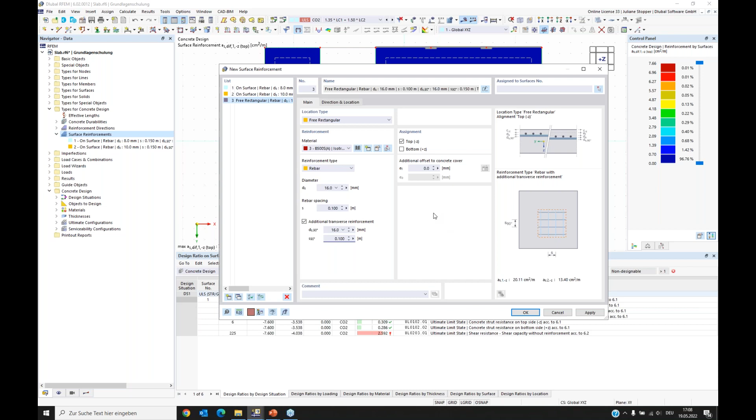And here you have to enter the position of your free rectangular layout of the surface. You also can enter which reinforcement direction shall be the first, but we can keep the default settings. What I want to do is tell the position, and I prefer this setting now for our problem. Here I can enter the center.

I can pick it on the working window, and I can enter the dimensions, and I want to have 3 in this and 4 in this. Okay, and it's going to be assigned to surface number 1. I say okay. It comes the warning again, and I don't want to see results now.

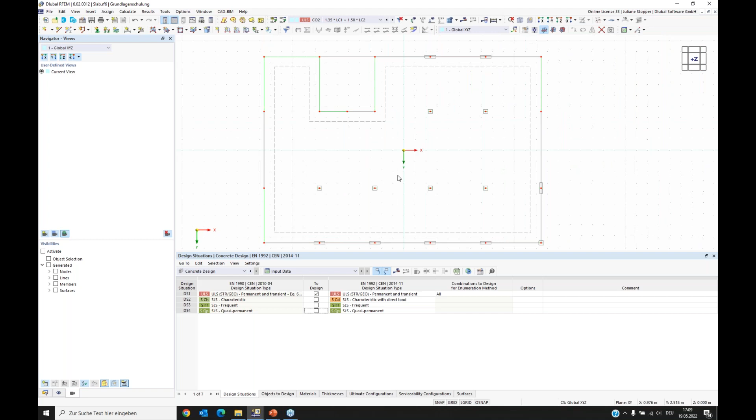And I also will use the wireframe view. I want to show you the reinforcement. Therefore, I again activate the types for concrete design. And here now we can see we have the surface reinforcement still, and we have some additional reinforcement there.

I can also switch off the surface reinforcement of type on surface, and then I can see only my additional reinforcement. I didn't want to have it like this. I want to have it with 4 meters and 3 meters. I want to have it like this.

Okay, and now I want to copy this. As I see the distance, I want to have this additional reinforcement at all supports. So I want to copy it here and here, and the distance is the same. So I can use this thing: I can use the move and copy and say create copy, but not only one.

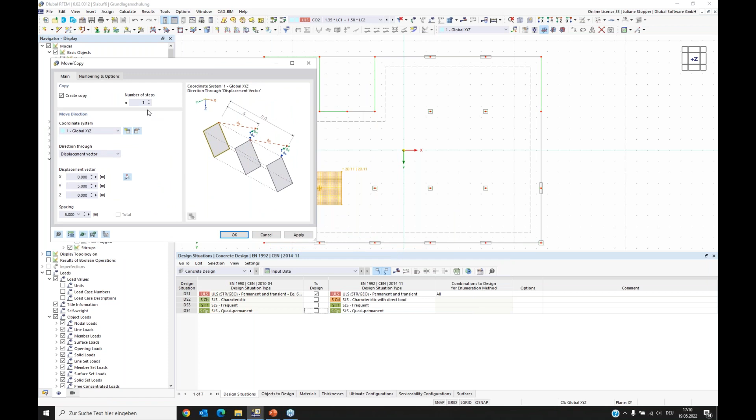I want to have 3 copies now. And I can tell the displacement vector it has to be a distance like this. And I can say OK. And now my 3 copies are directly generated.

And I want to also have a copy up to here. I need some additional reinforcement here and also at the corners. So I do... now it's only 1 because I don't want to have more in the next row. I give the distance, it's the same like from here. No, I cannot do it like this. The displacement vector has to be from here to here. Okay.

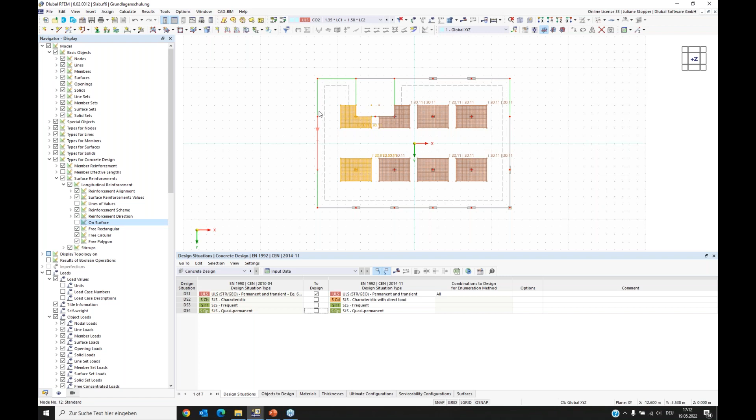And also I want to put some additional reinforcement here. It's due to the change of stiffness. We have here the supports, and here's no support. Here's the L-beam, and again here come supports. We also have some singularities here. So I also put a copy there.

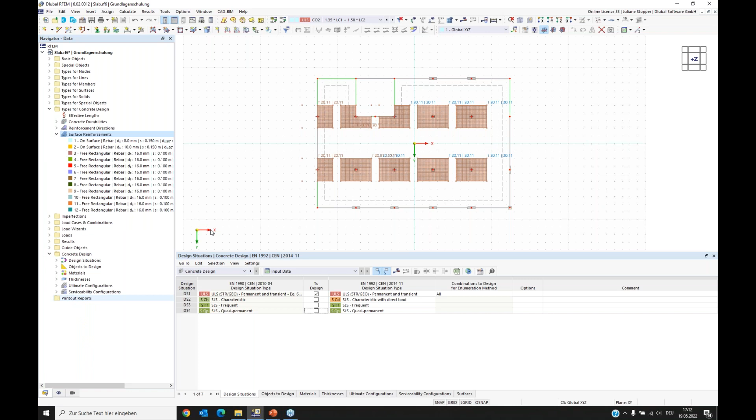Okay, so this is it. Now we can again calculate it and check the results.

I again switch off the reinforcement, and we will go into the design checks and check the top. I have to switch on the design checks, switch off the reinforcement, and now we see the first direction on top, and also the second direction at the top.

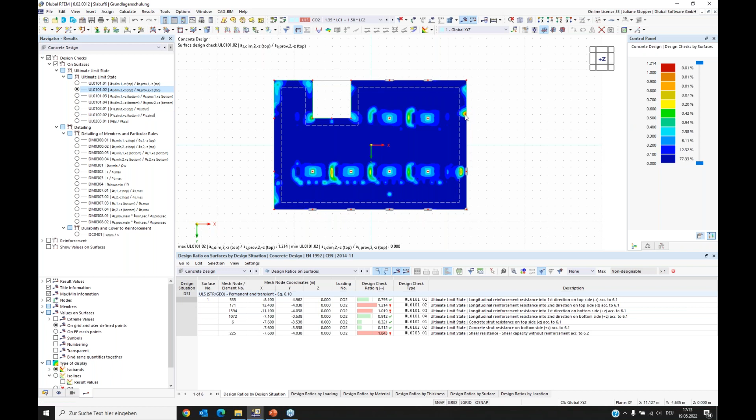We see that at very small places we have some higher values, but mainly we fulfilled the requirements of the standard with our additional reinforcements. So I want to now keep this design.

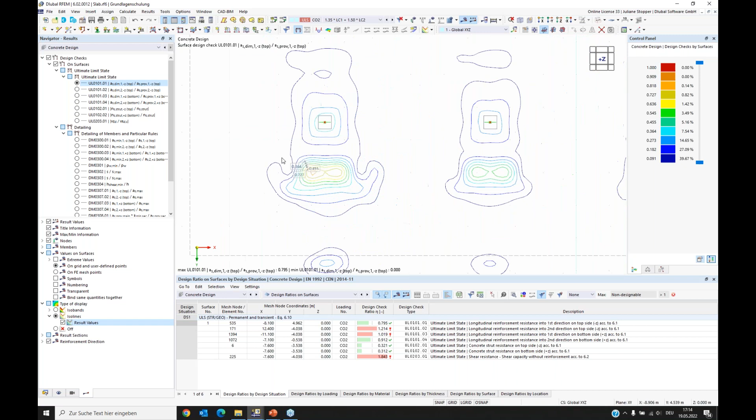I only want to show you a last thing. You can also change the type of display. When you want to print it, for example, it's not very comfortable if you have so much color in it. Here in the navigator results at the bottom, you can change the type of display. For example, you can change it to isolines, and say that you want to see the result values. Then you have the values for each line, and it's easier to print into your report or something.

And we have another option which is comfortable for this: you can show values on surfaces. Now it's a bit crowded, so we close this. It showed so many values because it shows the values dependent on the grid within this setting.

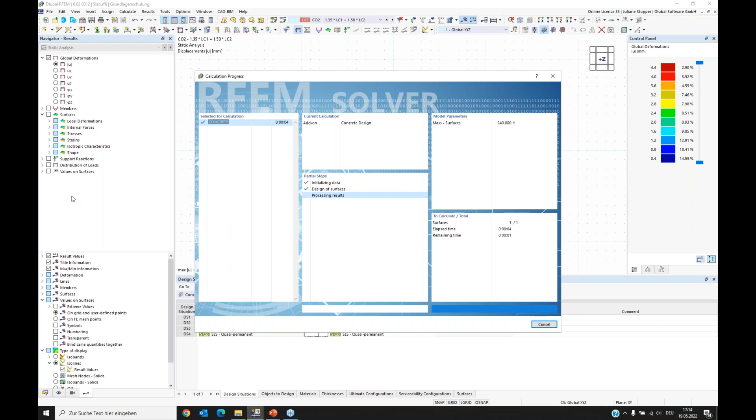The grid we can change in the surface here. We can say we want a grid with bigger distances, so there will be less values shown. We can shortly calculate them, and then we can also use the values on surfaces, which is nice for printing, for example. Okay, so this is it. This is what I wanted to show you as an introduction into the concrete design for surfaces, for slabs.

I would like to give my word back to you, Daniel. I think we learned a lot. Perfect, okay, Juliane. Thank you very much for this, you're welcome.

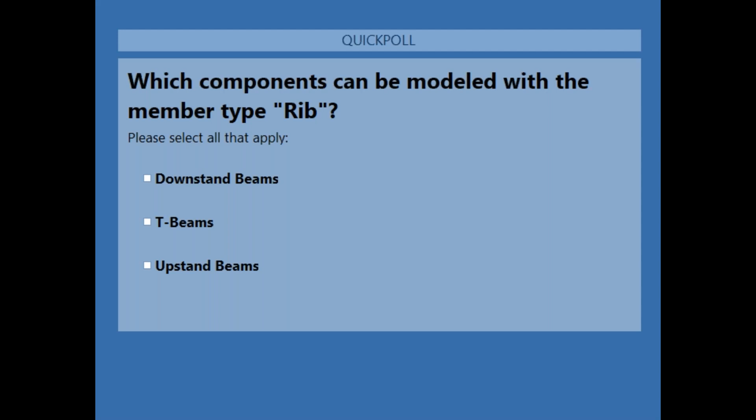Okay, so most of you have voted. I close this and share the results. So all three answers are correct. With the member type rib, you can design downstand, but also upstand beams and T-beams. When you want to consider the effective width, you have to use and consider the member type rib.